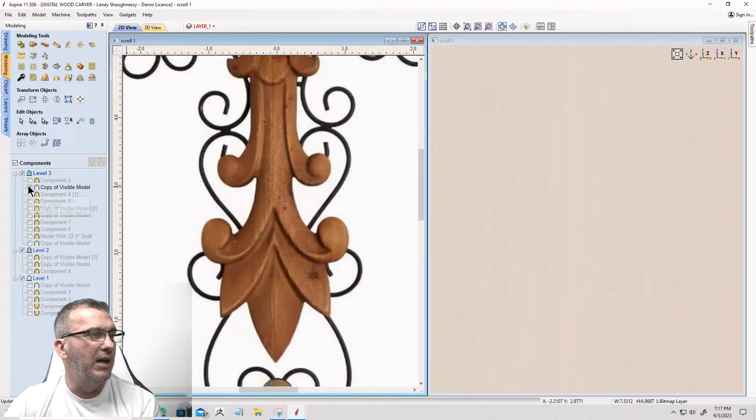I want to at least show the concept of the parts that we're going to be building from scratch, and how those parts are going to be put together in order to ultimately create this piece. I'm going to show you how to do that.

My hardest thing when creating parts is scrolls, these kind of swirls here and everything. It challenges me, but as you can see, I can do it, right? And I'm going to teach you how to do it too. But my biggest challenge was always trying to figure out how to build these scrolls and all. And they're done in multiple parts as well.

So that being said, let's turn everything off here. Let me minimize these. I'm going to start a brand new level. We're going to be starting from scratch tonight. And in level 4, this is going to be renamed my class model, part 1. Okay.

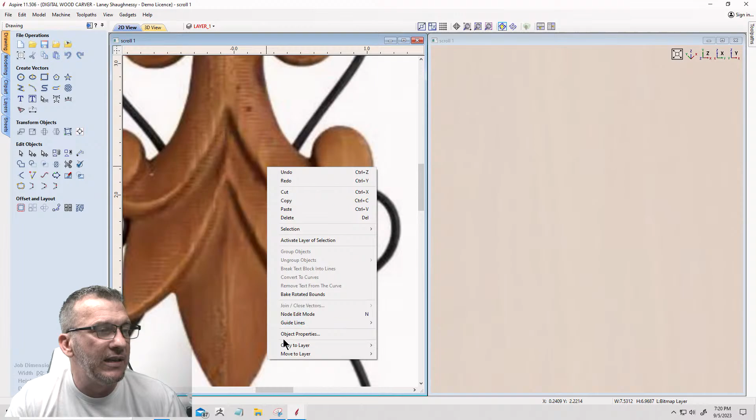On the image, if I right click, I get a menu, and I can come down to Object Properties, referring to that picture's properties. The only property the picture has is its fading property, so I can fade that picture in and out. And what I want to do is turn the fading off.

Whether I'm clicked on this photo or not, I want the fading off so it doesn't gray out, like when you're not clicked on a photo it usually fades out and you lose the detail depending on the photo. So I want this fading to stay off. I'll close that now.

Again, that's by right-clicking and going to Object Properties. In the Object Properties menu, the fading is normally set to default. We want to slide it to 0 so it stays dark. Now I'll adjust that fading property as I'm drawing just to see the lines, but while creating them, I want it in its full clicked status, like it's selected all the time.

The next thing is we're going to start with the swirl. Once we draw one swirl, the others we can just make from that swirl by sizing it down or up, whatever we need to do, so we don't have to draw a million vectors. We just have to create some of the main components.

So let's start here. Since we're working in 2D right now, just creating the vectors, I'm going to start with drawing those out. You can draw these vectors a lot of different ways - use the new freehand tool, the draw curve tool, the draw arc tool, whatever you want. I'm going to do a combination, using the arc tool: click here, click over here, and pull that arc just to get the rough shape.

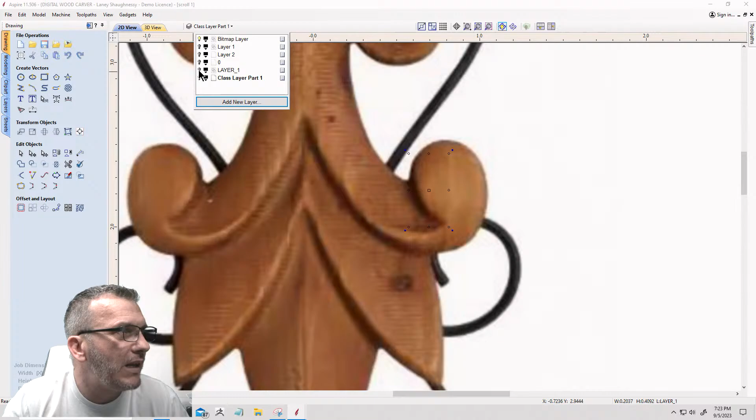And we don't want any other layers on, so we'll make that the active layer. Now we can start again. Once again, with the arc tool, I'm going to create the rough shape with a series of arcs. Once I have all the arcs created, I'll end up connecting the segments, smoothing them out and fine-tuning the shape. But for now, I'm just clicking in one place, clicking in the other, pulling the arc, and clicking again.

Now let me change the color of this layer to something we can all see when drawing. Let's see if we can change it to... red's hard to see because of the wood color in the background. Let's try... I'm looking at the computer screen to see what's easy for you guys and girls to see as well. Oh, these colors are all hard to see. Let's see here. Man, alright, let me do this.

Let me fade the image just a little bit. So, right click, go to Object Properties. Let me fade it just a little to where I can still see it, but it's not faded too much. Okay, let's see if I can pick a color that everyone can see. Ooh, that's a tough one. That's a tough one.

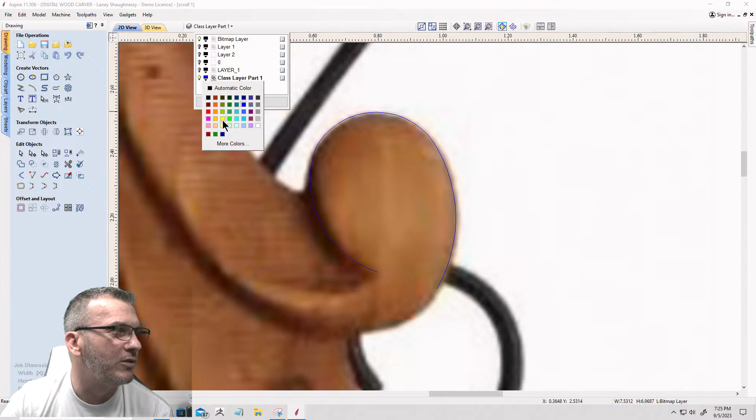Let me know if y'all can see that yellow. Someone said the green pops pretty good. So that's yellow, I don't know if you can see it when I'm up close. Alright, let's try green. I wonder if it's neon green or regular green, let's try neon green.

Alright, yellow or green for right now, ladies and gentlemen, give me a vote in the chat. And as y'all are voting, I'm still going to continue with the arc tool. Again, the arcs are just for the purpose of giving me something to work with.

Yellow is good, someone says. Alright, let's try yellow out for a while and then we'll pop back and forth if we need. Okay, try yellow for a while.

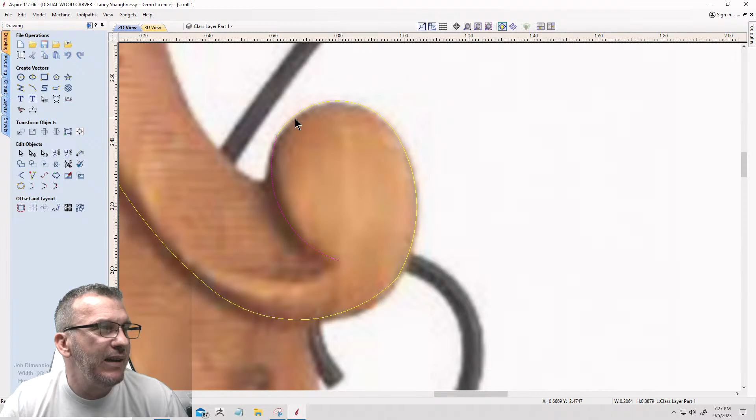The first thing I want to do with these segments is make sure the endpoints are together. To do that, I need to select both lines, both segments, by holding the shift key down when selecting more than one vector. Let's get into here.

What I'm going to do is make sure the endpoints come together. If I missed the endpoints, I want to make sure they come together, so I'll continue holding down that shift key, selecting the next line. I'm going to click this join by moving the endpoints to a common point of intersection. All that's doing is connecting these segments together, not smoothing them out, strictly just connecting them.

It's not smoothing them out or anything, it's strictly just connecting them together. Hold that shift key and do the next one and click on that button. And now this as a whole is one line.

So, let me do this one here. And here, for some reason, it did not want to do it the first time. This and this, do it again. And again. Alright, now that segment is all connected together.

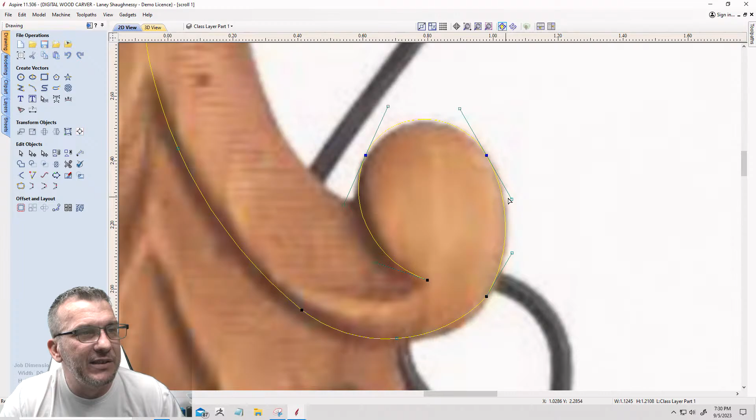And then same thing on this side of this node, I'm going to right click and make it a Bezier curve, and then on that node itself I'm going to smooth it so it gets rid of any hitches or kinks. That way I can manipulate this however I need.

And then again, on this side of the node, it's still an arc. I'm going to change it to a Bezier curve and smooth that out so I can adjust this arc here. And then the last one, I'm going to make a Bezier curve and smooth that out as well. All that does is give me a nice little curve, and it gets rid of the hitch where my arcs might have met up at kind of a kink, it smooths that out.

And then this is just going to kind of dead end up here. I'm going to pull it a little bit more to the right, kind of go about to the middle there. And I'm going up far. You see this kind of V's right here? We'll build that later, but I'm going to go up kind of far here.

Now my next part is to finish off the vector. Think of a 2-rail sweep. We're going to be using a 2-rail sweep. We need 2 lines to sweep a profile. So this first rail is the first line that I just drew, this first kind of swirl. Now we're going to draw the second rail, and we're going to do the same thing.

I'm going to use the arc tool, and it's going to start where the first one ended, and I'm going to pull that arc there. Now this one is going to go right along this ridge. I don't know if you can see this ridge right here, this kind of hump. It's going to go right on the inside of that ridge. So I'm going to go one full line because I can go just 2 segments here. And I want to go kind of close to this one, and pull it right on that ridge, just so it kind of follows that ridge.

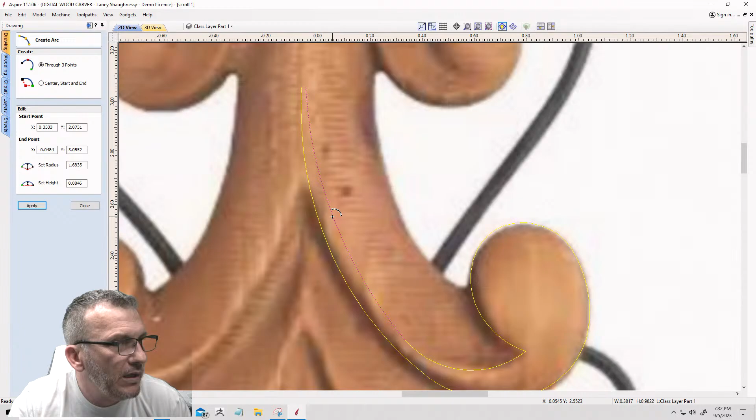All right, now I'm going to take this and this, these 2 items here, and join them together, put the endpoints together in case I was off a little bit. Then I'm going to go into node editing mode and make this a Bezier on one side of this node and on the other. Then I'm going to smooth that point out, which is already smoothed out for me. It did it on its own, kind of.

Now I'm going to adjust this to get kind of in that hump. You can kind of see the hump, that grayish hump right there. That's what I'm trying to get to. I want to move in just a little bit, or move out, should I say.

Okay, so I'm going to be happy with that for my second rail for this top part. Now you have to think of this top part, when it comes to this kind of scroll, if you will — I always had trouble. I always thought, man, how do they get it to be bulbous here at the top, but then they have it this negative here, and it's because it's two separate parts put together.

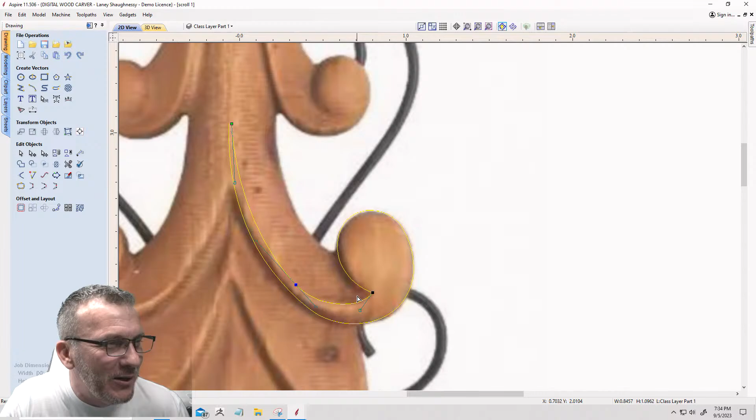So on this part, think of this as kind of a curved shape, and it's kind of like a dome, if you will, right? It's got that dome shape to it, so it kind of domes up. Not dome — it dishes. It's got a concave here, and so I need this component, when I build it, to blend with this one.

So the one rail for this part is going to be on the inside of this, because when that part gets made, I want it to be made inside of this. So I'm actually going to just use this line right here, and I'm going to hit copy and paste — no, I'm sorry, not copy and paste, I'm going to hit offset, and I'm going to offset inward just a few, in this case 10,000ths of an inch, and that went the wrong direction.

Let me hit undo, Control Z. I need to go outward. There we go. And I need it to be just inside that yellow line. So it's right here, this second line right here, just inside there, just so that when the component gets created, it will merge with my other component, that upper level and everything.

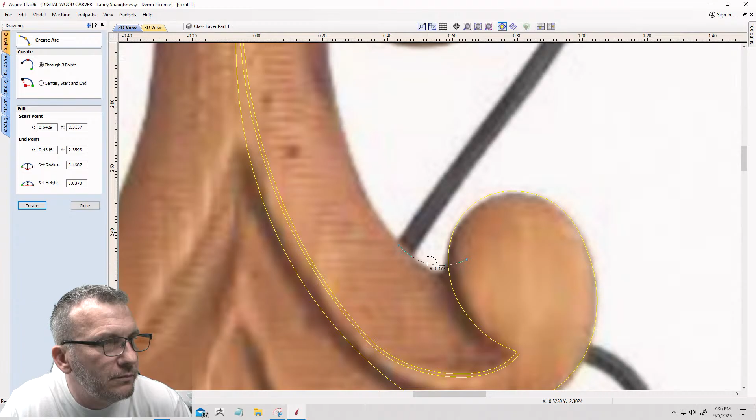So that's going to be the one rail, and it's going to go all the way up to here, and that's fine the way it is. That's good. Then my second rail is going to be here on the outside edge. So now I'm going to go back to my curves, my arcs and stuff, and I just need to do it in 2 arcs.

Now we are using the image as a reference image. It doesn't have to be 100% exact. You can make adjustments. I'm going to have it come in just a little bit instead of right on the outside edge there, a little bit. But on these two segments, I need to connect them together.

So let's join the endpoints, and then I'm going to go to node editing just like before. Bezier on one side of the node, Bezier on the other, and then smooth that node out. And now notice that this comes in more right here on the actual part, and I can get this to do that.

But if it causes a kink in my part here when I build the model, because it's too tight or something like that, then I might not follow it exactly. But that's going to be good there. And here, I'm going to pull this in just a little bit.

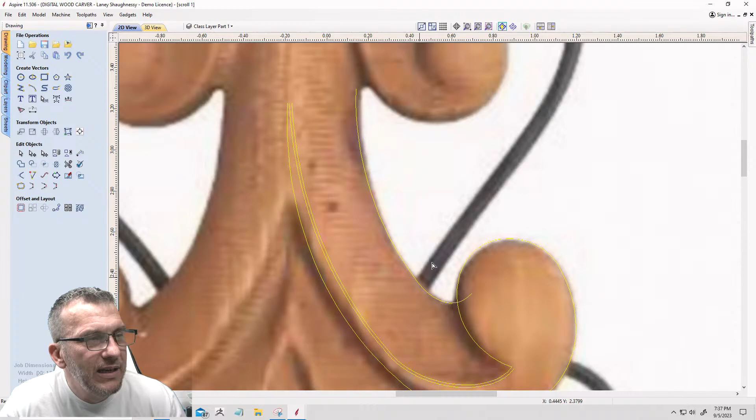I need a line, kind of a shape here, if you will, but I can't have them connect. But I do need it to connect to this. So what I'm going to do is use my arc tool, and I'm going to connect from here, and click close to this one, but not right on it. I'm going to kind of create that for just a minute.

I'm going to get up close and personal here. I'm going to bring the node where it's close to but not connected to. I'm not going to join these two lines, but I'm going to bring the nodes or the endpoints where they're very close with one another but not touching, because I need it to be two rails. It's a two-rail sweep, so I can't have them joined together.

But I do need it joined over here, on these two, so I'm going to connect these two together. Let's hold the shift key, get out of node editing for a minute, join this and this, and bring the endpoints together.

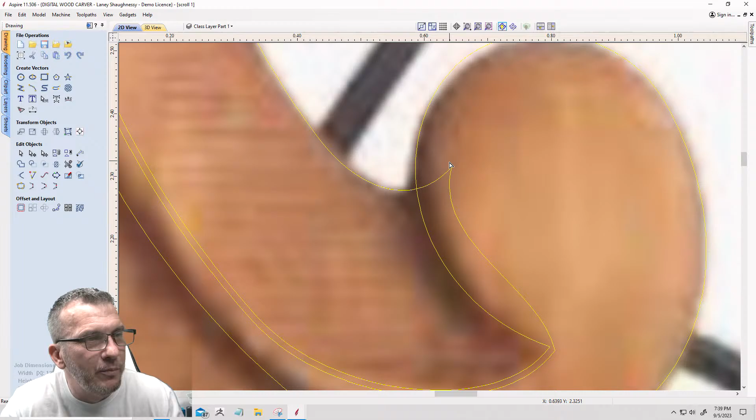And then in node editing, I'm going to make this a Bezier curve, and it's going to be a weird looking shape, but it's going to come into this bulbous area a little bit like this. And because again, it's going to be low and merging into this part, you won't even see it.

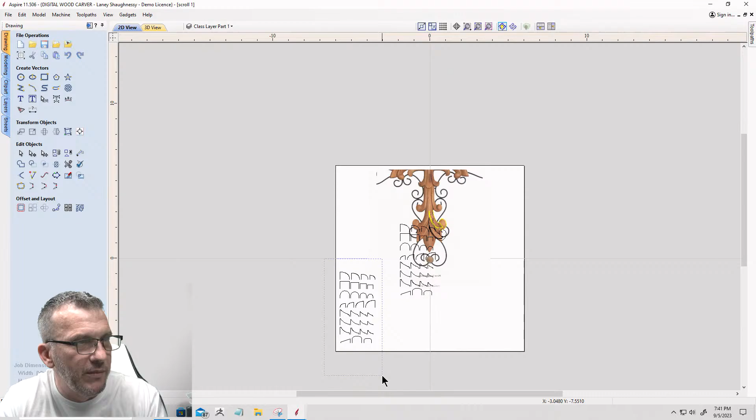All right, let me take those. These are them there. Let's do an undo real quick. Undo. Let me take these and move them to my working layer so I can turn off the other layers.

All right, let's move these up where everybody can see them while I'm kind of zoomed in. And what I have here, let's put these on a different layer. Hold on a second so we can see them. Let's move to a new layer. I'm going to call this Profiles, and we'll leave it black so that way everybody can see.

All right, and so on these profiles, what we have are a variety of profiles scaling down. Basically, this is 100% of the shape size. Hey, Brooks, man, thank you very much.

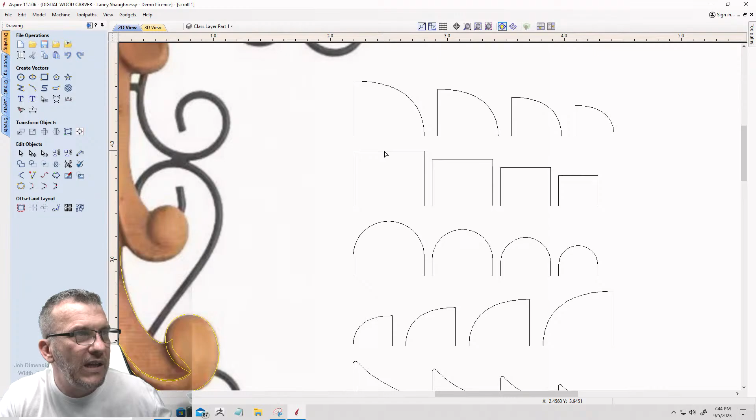Basically taking this shape created all the other shapes. In node editing, you delete this point, turn this into an arc, and pull that arc into shape - that's how that shape was created. Undo that. Or taking this and turning it into an arc, then sizing everything down - that created this shape. So on and so forth.

So there's a couple of curves there, a couple of concaves, and then some angles and stuff. So you're going to have a DXF file of all of these.

Let me get this all back to where it belongs. Okay, you're going to have this DXF file, it's called profiles - scroll profiles. And we're going to be using a combination of these to create our shapes.

Now let's split up our view here because we're going to be doing some 2D and 3D view. We're going to be building the part now, so we're building these parts. We're going to draw the vectors, and then build the part.

Hey, no problem Rob, don't worry about being late. We're just getting started. We just drew some vectors, as you can see on the screen here, these yellow lines and everything, and things are just getting underway.

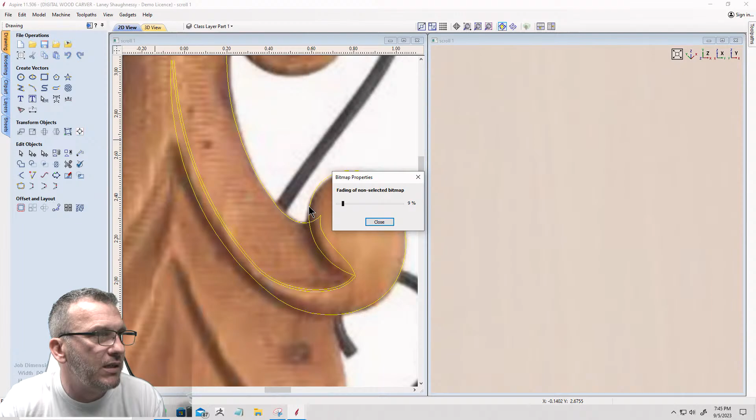Let's turn our fading to none. Should be able to see that yellow a little bit better there. All right, so first things first, rail selection is important - which rail we select first and which second when we're building components and doing 2-rail sweeps. But with this tool in Aspire, this part, ladies and gentlemen, this is an Aspire feature.

Harvey, I like greener landscape. I hope, Harvey, I don't know if you were answering someone else's question to you, but you probably were. And hey, I hope you enjoyed the leftovers. Okay.

We're going to do the bulbous part, the upper part, first. So I'm going to select this main rail first, hold down the shift key, and select this inside rail second. So this one first, hold shift down, this one second. In my 2-rail sweep tool, that's going to be my drive rails. Now depending on which way the drive rails are facing, we may have to go in and reverse the rails, meaning having them face the other way.

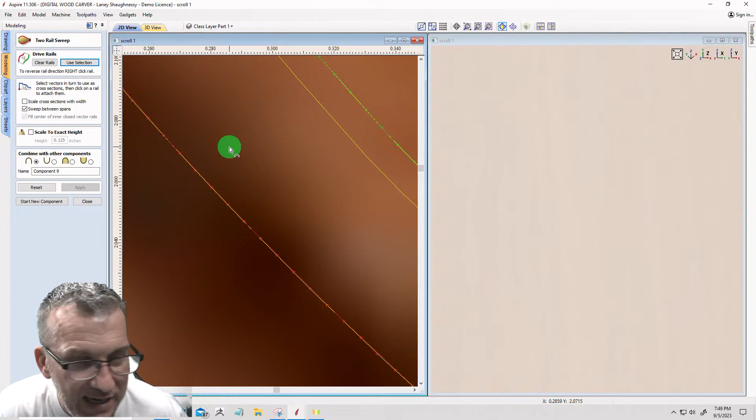But anyhow, the arrows are pointing in this direction, so they're sweeping up from the bottom right corner of the screen to the top left, and that's what we want. Hey Sylvia, how are you doing? So that is our two rails, they're selected.

Now we've got to select a profile. The first profile I'm going to select is this square profile, and I'm going to come over and click my mouse right on this node. You're going to see all these crazy cross sections pop up here, and this is going to kind of create the area of the cross section, the main part. But we're going to come over to our profile here, this top one, this curved one, and we're going to select that next.

And out here over on this side of the bulb, we're going to click. When I click on that, it's going to shoot this red line across the screen. So this yellow node is my second cross section, and it shot the red line over here.

Now I actually need to grab the white end of that. There's a yellow and a white. It's hard to see, but I need to grab that node and pull it around. Let me zoom in, and I need to pull it close to, but not on, this node right here. Not on it, but just very close to it.

Now you'll see the cross sections are more in this bulbous area, and they're not jumping across anymore. We don't want them jumping across. You can see that they're in between my two lines at different spaces. So that curved profile is going to be in this area.

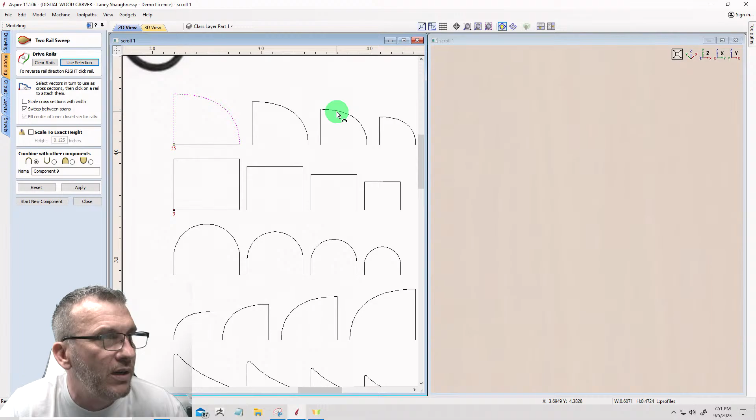And now I need the same curved profile, but I need a smaller one. I'm going to choose the third one, no particular rhyme or reason, I just want a smaller one. But this is going to be my third profile. You can see these numbers here.

I'm going to come over, and at the very end, I'm going to click on the node. It'll change that color, so it's going to size when it sweeps around. What I've just done is, when this sweeps around, it's going to scale as it sweeps from the larger to the smaller profile. So as it gets closer to the tail, it's going to get lower and lower, sweeping around high, and then as it gets to the tail, it's going to sweep around lower and lower.

So we're using what's called cross sections, and these are cross sections, our profiles here, and we're sweeping. We have a square form for our shape, but we want a rounded top, and we want it to sweep from the larger to the smaller one as it gets to the end.

This is going to be the hardest part of modeling, especially in the two-rail sweep, is understanding the cross sections and how the section is created. Basically from this line here, that sweep is going to sweep from large to small. That profile is going to sweep from large to small because it's going to end there.

And I'm going to show you, we're going to create just a square profile so you can see for reference, so you understand. But we're going to do a merge. We're not going to scale the section here, and we're going to click apply.

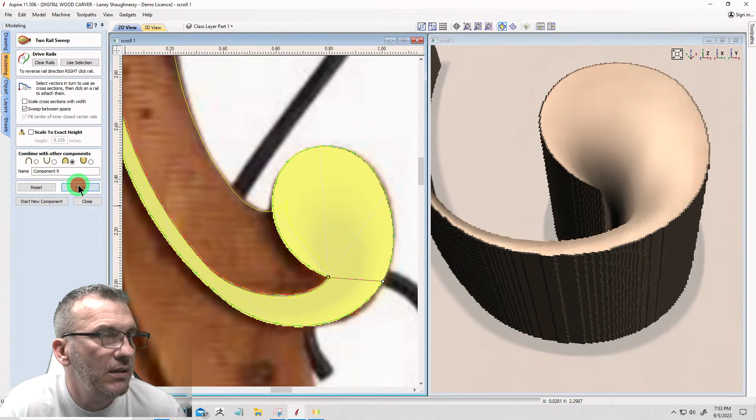So rail direction is important. I clicked on this inside rail first, that made it red. The outside rail second, that made it green. By doing that, it was taking my profile and reversing it, making it concave in instead of convex out. So I had to put the mouse over the rail and right click, and swap the rails, make this one green and this one red, so that it did the opposite. It created that bulbous here.

Okay, all right, let me get back into shape here. So what we have is my profile, my big curve, that big curve right here, scaling down. Let me see if I can turn this. Big curve right there to little curve right here. So it's scaling down as it was sweeping across those two separate profiles. Big to little, and that's what we need to do.

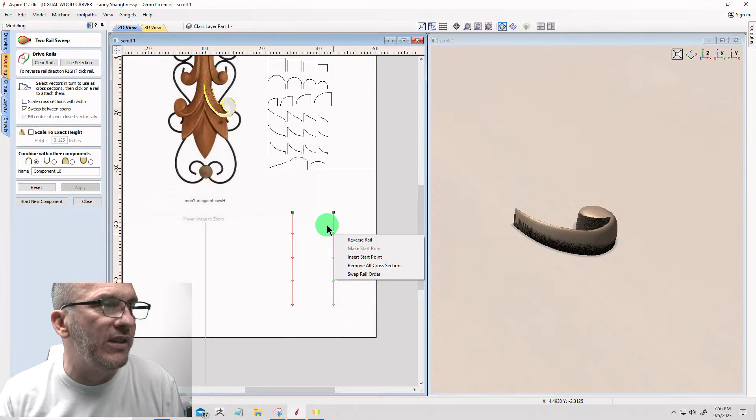And if I have to change the rail order, it means this one needs to be first, this one second. So this is red, this is green. It'll switch, okay.

Just depending on what it needs. And in my case, I needed to swap those rails.

Now, let's grab a profile, and let's do the regular dome here first. I'm going to come and click right on my first node, and you'll see these lines come up on the screen. These are cross sections. Now, that profile is getting swept from one end to the other.

So, if I apply that, we're going to have this dome-shaped part, and let me zoom out to where it is. We're going to have this dome-shaped part that's the same size all the way through, right?

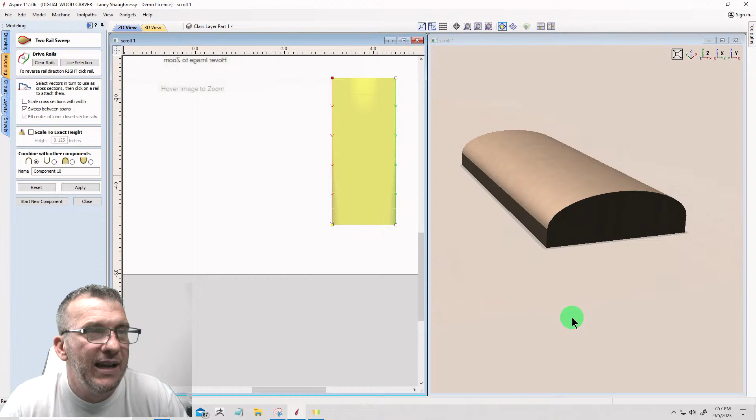But if I come in here and select this smaller dome, and I come to the end of my line and click here, now it's going to scale as it goes from one end to the other, from that large to that small. So when we click here, you should see I start flattening out a little bit as I get from one end to the other, from that large to that small.

Now, you have to understand something here. Your profile is kind of close and round. Why is this more flat and narrow? It's because my lines are wider, right? If my lines were closer together, I would be taller and wider. But they're spread apart, so it's kind of narrow and short. But my large profile sweeps down to my short profile, right?

Now, what happens, let's say that I take a concave profile and make that my profile on one end, and I take a convex profile and make that on my other end, and I click apply, I'm going to go from concave to convex. So let's turn this around where you can see. So as it transitions, it's concaving or convexing here, but as it transitions perfectly into that convex, transitioning perfectly into that convex.

And let's say, just out of curiosity, just so you know, if I click here and I click here, so round to square, let's go square at the end, down here, and click apply. It's going to go from round to square, right? So it'll be round here and square here.

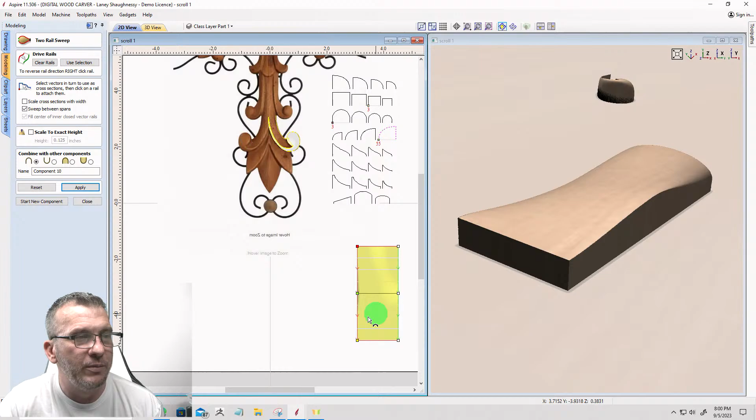And that is how, using multiple profiles, we get different shapes in 3D models. Like when flowers have curves, they're bulbous on one end of the flower, but as they go into the petal, they're kind of flattening out into a concave shape at the petal and stuff. And we do that by transitioning the cross sections, and we can add in multiple cross sections to get all kinds of different shapes.

Okay, so in my case, I went from the big curve to the small curve on that shape we're creating over there. All right, cool. All right, so that's kind of a little quick and dirty lesson on cross sections. All right, let me come in here and delete that.

All right, now coming back here, you're going to actually see that transition because in this, look at my shaft right here on the base of this cross. It's convex, right? It's convex, it's curved upward, it's domed. But as it transitions into this kind of upper area here, it starts to concave, right? It goes from that arch and it starts to concave into here.

And so that's what I need to happen on this part. So coming back, we're going to select, let's get onto our 2-rail sweep tool. We're going to select our inside rail, hold down the shift key and select our outside rail. The important thing is the order. Let me learn where my shift key is.

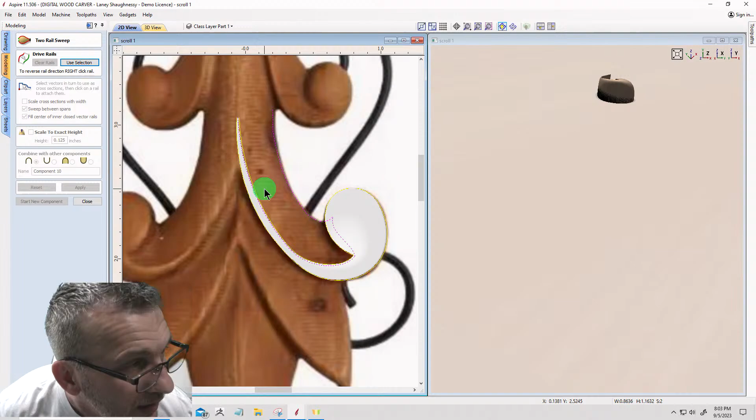So in this case, when I choose the rails, right now they're going into this section here, into here. And so my first profile is going to be this large profile here, and I'm going to click on it to create that cross section.

And then I need to concave in this direction here, so it's going to be this one right here. This is going to be next, and I want it to be kind of the same scenario where I'm going larger to smaller.

And I'll go to the third one here because I want it to get smaller as it goes. It's got to get lower, lower, lower as it goes under that bulbous there.

Let me get zoomed back into the part here so you can see what happens. I'm going to be transitioning to this part here, so we'll make that there, and I'm going to merge the two together. I want to make it merge, and I'm going to click apply.

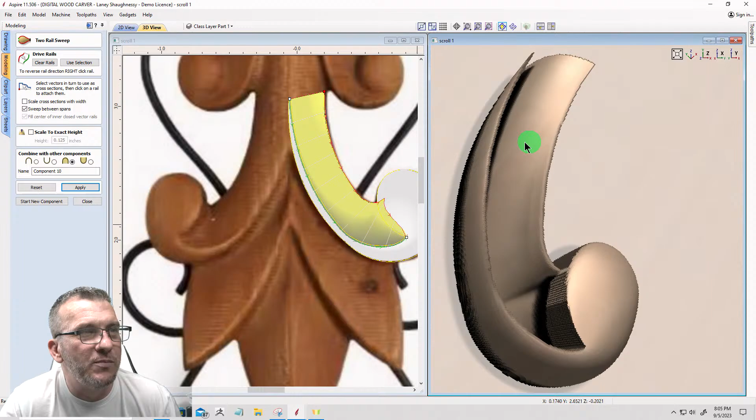Okay, now let's pay attention to what I'm doing here. You see it's backwards, my curve is backwards here because my rails are set the wrong direction. So I need to come in here and reverse the rails, or swap the rail order, and then click apply. That'll turn that profile around.

Okay, so I'm going bulbous here into that concave down below. Let me get zoomed in so everybody can see. So we're concaving, creating that half of that staff there into that convex, into that arch.

Now we've built one part. Now we're going to touch it up a little bit. Now, in my component tree, I've got my two separate parts. I'm going to be sculpting them, touching them up, smoothing up the edges and things like that. And if I select these two parts and start to sculpt them, the software is going to require me to bake the two parts together as one, the two components together as one.

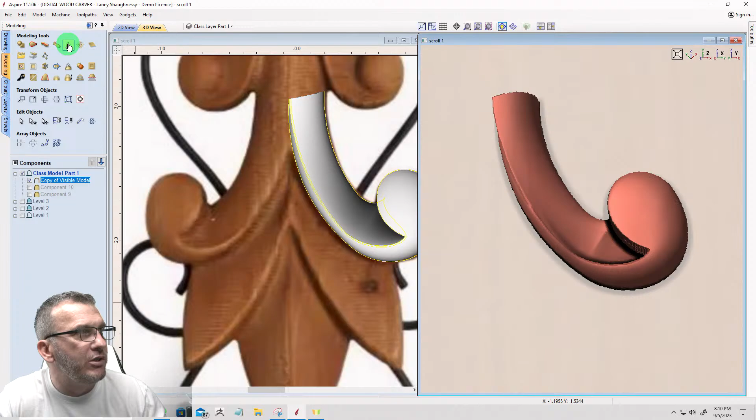How you doing, Mark? Hope all is well. How was your podcast tonight, or how is your podcast that's coming up?

Okay, we're going to use the smooth tool, and all I'm going to be doing is, don't hover on a place too long. Keep that brush moving, or it's just going to keep flattening it out. I'm going to start rubbing this top edge and smoothing it here, around the edge, around this inner edge on the top, smooth that out, come back.

Now, when I'm smoothing this, I have to be mindful that my line, that ridge, sometimes it can smooth out too much, and it doesn't look as defined, or it doesn't look straight any longer. It might be wiggly looking, just the way it smooths.

So in here I've got a little bit of a hump. Let's see if we can fix that. Now I've got to twiddle my view to zoom in. But in here I've got a little bit of a hump, and the smoothing tool, all that does is smooth it out.

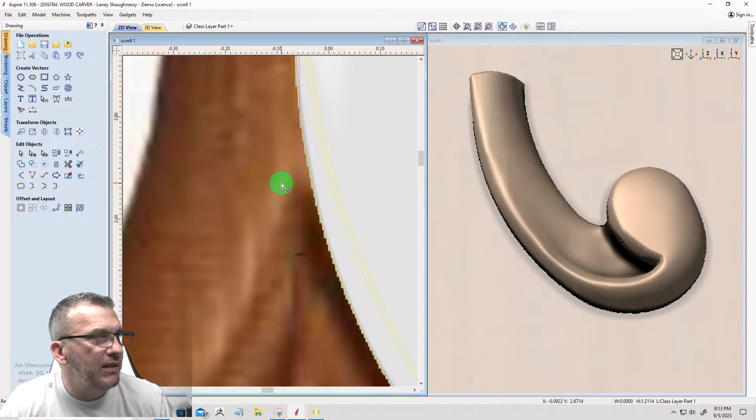Snap to 90 there, boy — snap to 90, there we go. I don't know why it wasn't snapping. Space bar to finish, and I'm going to take that line and extend it down. And that's going to kind of be my center line. And I'm going to take my part, my model.

I'm going to select that model, hold down the shift key and — oops, let's try that again — hold down the shift key and select the line. It doesn't like me right now. It does not like that. For some reason, it's not wanting me to select that line.

Okay, stand by. I don't know what was going on, but it was not letting me select that line. But anyway, we are now going to mirror this, and we're going to flip about the line. Now, flip about the line is not active, most likely because it's touching other lines. Let me see.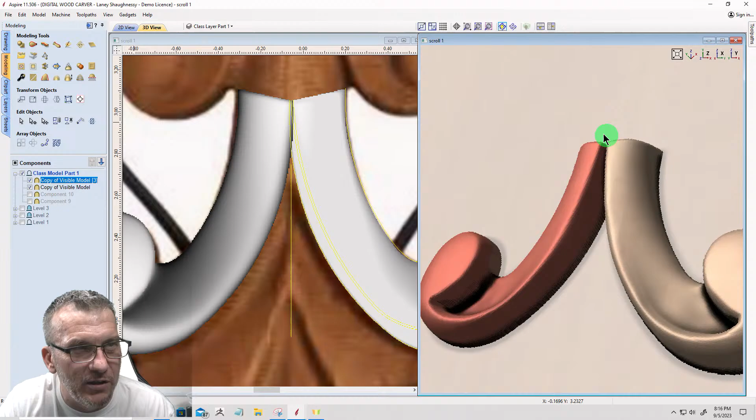All right, so there are our two parts. Okay, next.

Let's do the leaves. Now the leaves are easier than the little swirls. Those swirls, ladies and gentlemen, they are the bane of my existence. Now I've gotten pretty good at being able to make those, but I'm still not perfect.

There's this one guy I don't know who it is on YouTube, he doesn't have any sound or anything in his videos. He's just drawing, you know, picture to 3D model and everything. And he does scrolls and stuff like this in some of his videos. No talking whatsoever, he's just going on. You just got to watch and figure out what he's doing, watch his mouse very closely kind of thing.

But his always look perfect, his swirls and everything. Mine are a little rough around the edges, you know, the transition, this arc isn't as nice and clean as I'd like it. His are perfect, right out of the gate every single time. I don't know how he does it. But you get as good as you can get, right? And you just practice, practice, practice.

Okay, now the leaves. You have to think about, even though this leaf here is hidden underneath this scroll, there's still a leaf there, there's still kind of a full arc. So when we draw this.

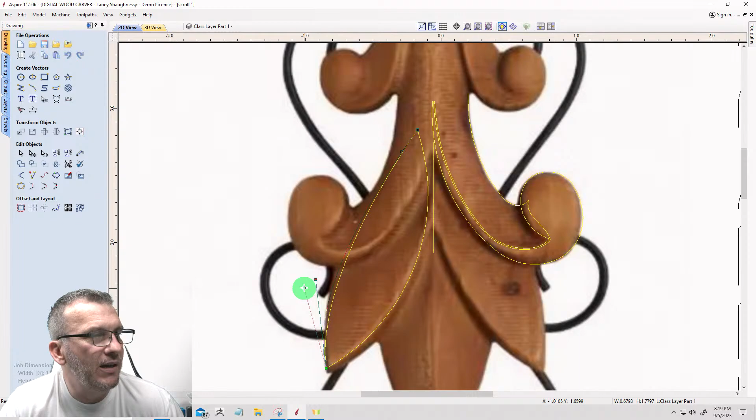In node editing, to a Bezier curve. And I'm going to pull this in just inside and pull this out like so. And on this one, I'm going to pull this out like so. All right, that's going to be my shape.

Now on this one, this is just kind of a slant. You know, it just slanted down. So when I do my 2-rail sweep.

It turned my model back on. When I do my 2-rail sweep, I'm going to select that and that. That's going to be my rails. And then on the profile, I'm going to use this profile right here, this profile here.

And let's go to a split view so you can see what gets created. And we're going to merge that in and click apply.

Okay. The leaf here, I need it to kind of scale. Let's see, let me turn on the scaling here. Let me see if I'm wrong on that thought process. Yep, no, that's what I need.

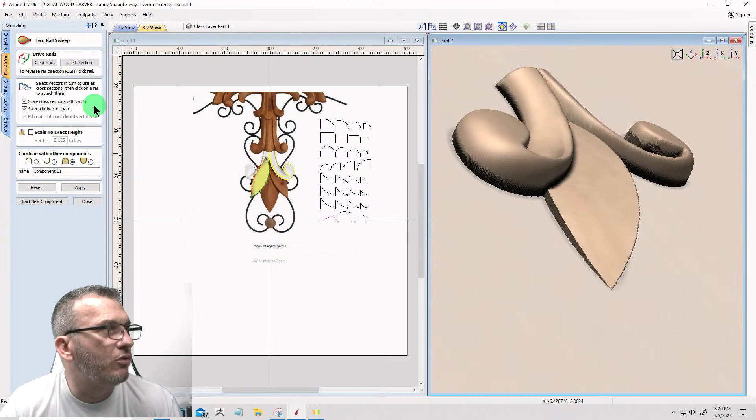So this one I had to scale the cross section with the width, so it creates a consistent flow there. Okay.

All right, so on that one, I'm going to close out of that tool. I'm going to click on that component and this component here, and I'm going to give it a little bit of base height. I want to raise it up a little bit, but now I got to be careful that I don't raise it up too much, because I don't want to be able to see any part of that leaf poking through.

So I'm going to go into the properties, that spanner wrench tool, and I'm going to give it some base height, a 1/16 of an inch. Okay, now when I gave it that 1/16 of an inch, that was a little bit too much. So let's bring that down some.

I just want a little bit of base, not a whole lot. Okay, I'm good with that.

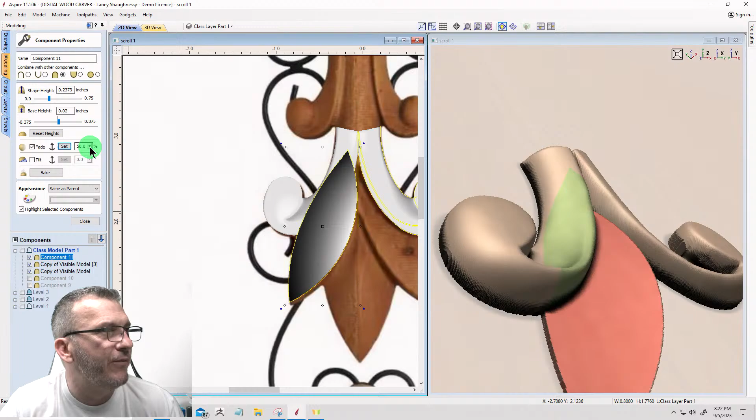By default, it's set to 50%. You can see that fading went away—it made it disappear there. Now, I don't think I need a full 50%, so I'm going to back it down to about 20%. I want to see if it's sticking up at 20%, which it does, but it's so small. Let's go 25. Still there. Let's go 30. Good, so it just needs that small fade.

All right, so there's part 2. Let's go ahead and select it—select the line, hold that shift key down and select the line, and then mirror flip about the line.

Okay, now these parts don't quite touch one another, and I'd like them to kind of crisscross. I'd also like them to come up a little bit more. So I'm going to undo that—Control Z, undo the flip for a moment. This is where I'm going to deviate from my model a little bit. I'm going to scale the size of this up and over, kind of thing, so that when the parts do flip, when I flip about the line, and I need to bring it up some too. I want to size it up about like that.

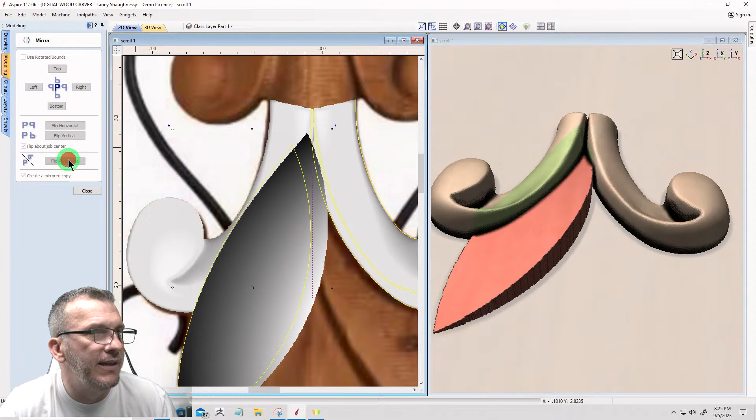Okay, now ladies and gentlemen, you're going to learn the cool effects of merging low versus merging high. We don't really get to talk about that too much, and one of these days I want to do a class on it—I did that with Mark Lindsay's group and everything. But you see that where I'm overlapping here, those parts are sticking up. This leaf is sticking up over here, and this leaf is sticking up over here.

On these two parts here, I'm going to create a new level, and I'm going to rename this level 'my class model, Part 1-A.' I'm going to take those two leaf components and put them up into that level, moving them out of the level they're in. I need these two models to interact with one another independently, but that level they're in needs to interact with the level below, and all the other parts need to play nice together.

So for the combine mode of the level, how it combines with the level below it, I'm going to change it to merge. I need it to merge—just like they're merging right now. But these two parts have to interact differently with each other. So how the level interacts with the level below is different than how the models inside that level interact with each other. So we're going to change this combine mode to low.

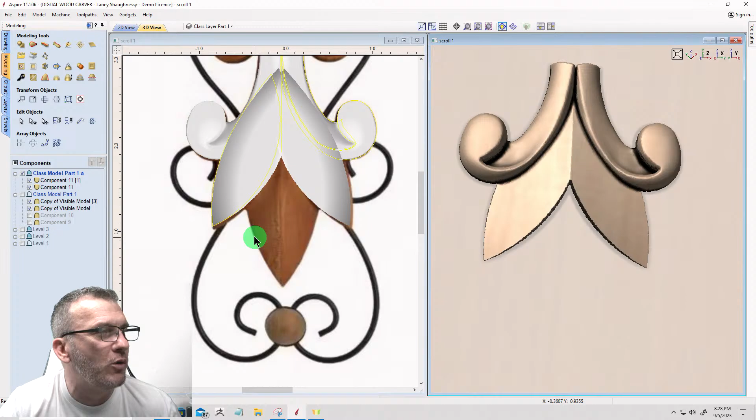Very, very cool. Okay, now we're just moving along, cooking with some gasoline. All right, so now I've got those two parts—wonderful. And the next part is this leaf. Again, we're going to imagine that this is a full leaf here, it's just underneath all the rest, right? So let's turn off our levels for a moment.

Let's hide some things and go to our drawing tools. I'll use the arc tool again, starting at the end here, going up to right about there, and pulling that arc over to here. And from the end here, same place, pull that arc there.

Now, on this profile, this leaf has kind of a ridge in the middle, and I'm not going to use any one of these profiles. I'm going to make up a new one. So we're going to make a new profile.

I'm going to take my arc tool and span right in the middle of my leaf, all the way across, straight across, and then just a slight curve. Very little. How much this curve is depends on how fat my part is. How big my curve is determines how tall my part is. So I want a slight little curve.

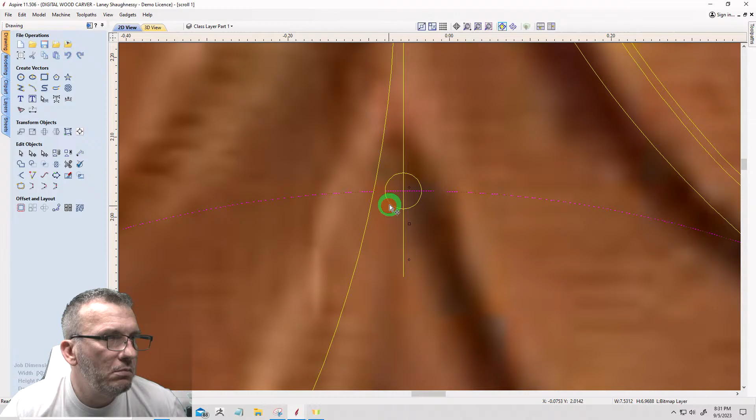Good enough. All right, now I'm going to take my scissors and combine this part here, this, and this. I'm going to join that as one shape. So that's going to be one shape.

You see I was long on this side, short on this side. I need it to go all the way to the end. It's very important. So I'm going to go into node editing and pull this back to this line. Node editing and pull this over to this line.

All right, 2-rail sweep. We're working that 2-rail sweep tool tonight. We're going to select our first left side, then our right side, and use that as our rails. We're going to select our profile that we just created, and we're going to scale it with the cross section, sweep it between the spans, and merge. Merge, create the component as a merge.

Let's get into a 3D view so we can see what's about to get created here. Click apply. All right, so now let's close that tool.

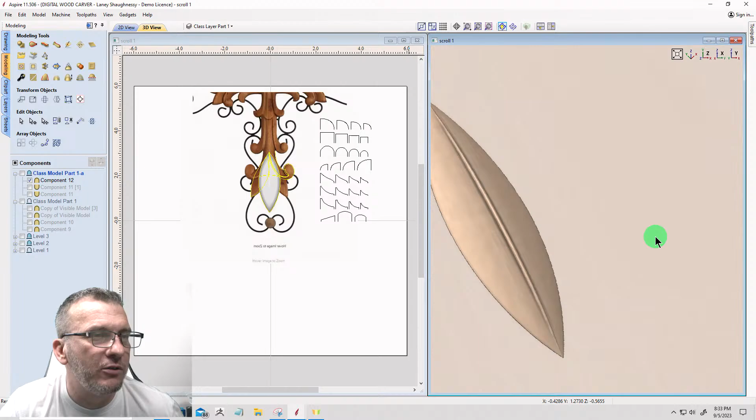Let's turn off our two side leaves for a minute. It almost looks like if you were building a little fly or beetle, you could do the same thing for the wings. But this is our leaf that was created, and there's that little ridge. So that's kind of our leaf. And how big the arc is determines how tall this is and everything. All right, let's turn on our other parts.

Now on that leaf, I'm going to select the leaf and go into its components. I want to change the height on this. I want to give it a little bit of base height, a little meat underneath it. So I'm going to go 1/16 of an inch of meat.

All right, let's try that again. And the important part is that I don't intersect too much over here. If I turn the part off, you can see I'm just coming out right there, and that's kind of fine for me. I'm okay with that, because my handle, or this rest of this leg, is going to come down over that.

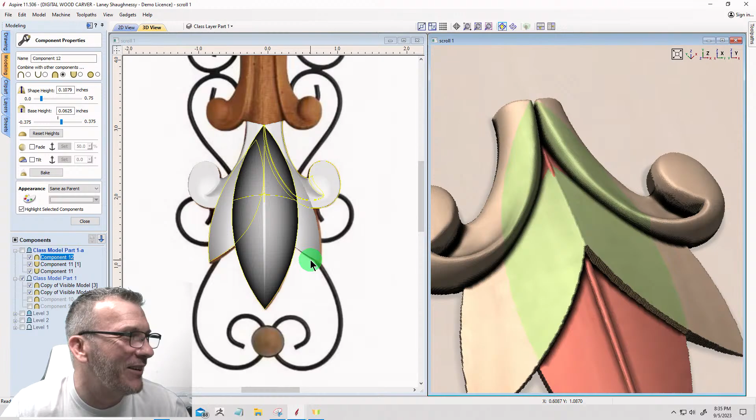Take my fade and set that, going from here to here. I'm going to turn that fade down dramatically low, because it only needs about 10% of fading. Oh, a little more than that. What I'm looking for is right up here, that little bit of red right there. So let's go 25.

Good, so 30% fading. All right, so that'll get rid of that. So now this is our shape so far.

Okay, now I've gotten a pretty good ways, and I've got all these individual components. So I want to be able to work with one component at a time. I've got my originals here, but what I'm going to do is go ahead and start a new level.

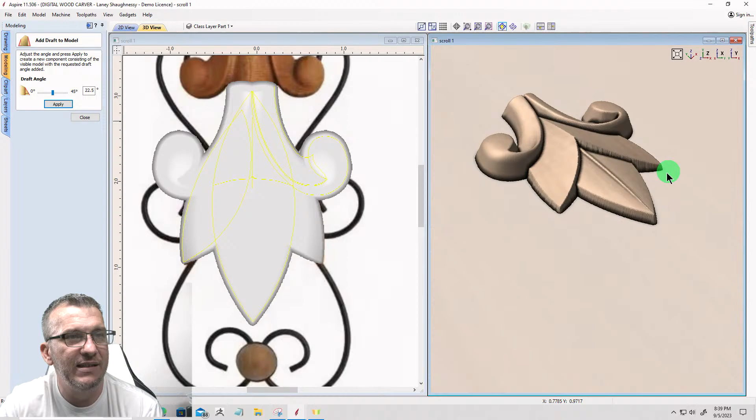All right, so what you can see is that little bit of draft here on the sides. It just kind of puffed everything out a little bit, gave it a bit of draft there. And that is going to be, let's call it the tip of my spear, right? So that's going to be the tip of the spear there.

Now, let's take a look at this cross in its entirety, and let's really see what's happening here up here. I've got it cut off, but let's import an image.

Okay, and let's move that up here. Now, paying attention, that spear that I've got created here, it's the same spear, just size smaller, that's on the left side here, and the top side there. So I don't have to reinvent the wheel, I just got to scale it down a little bit to make those 4 copies.

Okay, so once I've created that, now I can scale this and copy it around 4 times to create those pieces. So what does that leave left? That leaves my round shaft right here in the middle, and then it leaves this part right here. So this kind of middle cross right here, which is made up of these kind of U-shaped little swirls: one there, one there, one there, and there. And then this kind of humped shape here in the middle.

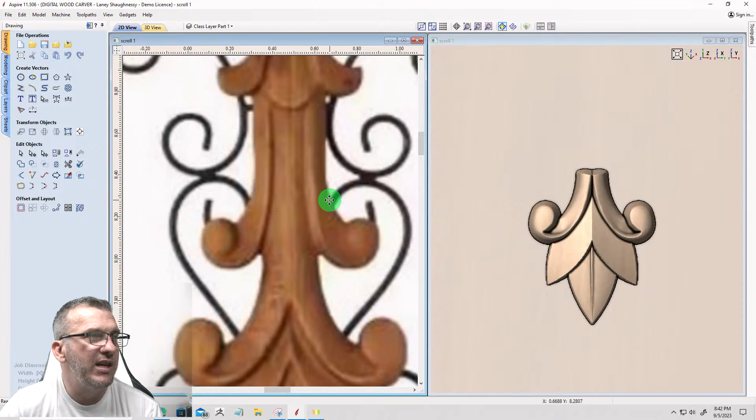Let's stay with the lower here for a moment, and let's create this shape here. Now I'm going to get rid of this image, I just wanted to show you in a full kind of what's going on there, right? But let's go ahead and get rid of that and go back to here, because all I need on this is this lower picture. Even though it's cut off here, I still can create it just from this. Here, that's all I need.

So the next part is kind of this scroll, so let's do it again. Arc tool, and again, I don't have to do this, I already have a copy. I can just drag the copies up, but I want you to see, right? So we're gonna start here, pull it to here, and pull that around. Let's go into the 2D view.

We're going to come over here to somewhere over here and pull that up. We're going to come down, pick a spot anywhere and pull that out. We're going to come over to here and pull that down. And then from here to here and pull that, about like that.

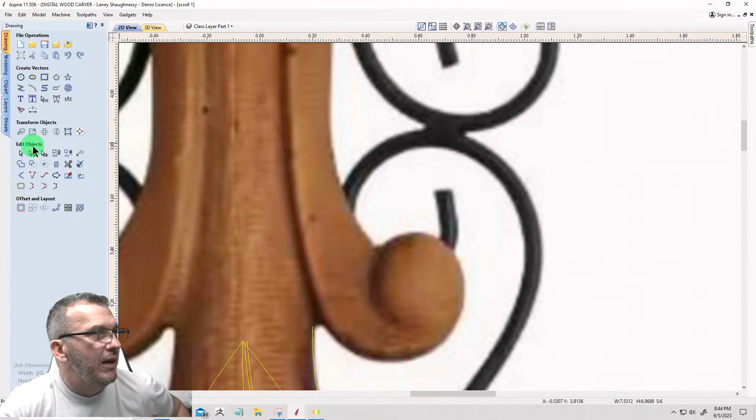For me, it's the arc tool, and then from there, in node editing, I can come in here and turn this into a Bezier curve on both sides of the node, and on my points there. Bear with me a second, I inserted a point when I shouldn't have. All right, one more time. Bezier curve.

Okay, these two ends did not join together. So let me do it again. Same thing here, for some reason that tool is just giving me a fit today.

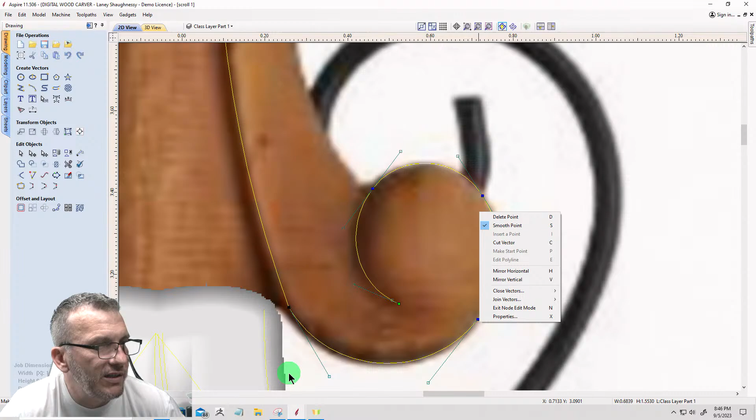Those are all joined together. Wonderful. Now I can get back in there and smooth that point, turn this into a Bezier curve and smooth that point. Turn this into a Bezier and smooth that point. It's already smooth, so just one more. Okay, now I can fine tune my shape.

I'm going to go straight up. Okay, so there's my first shape.

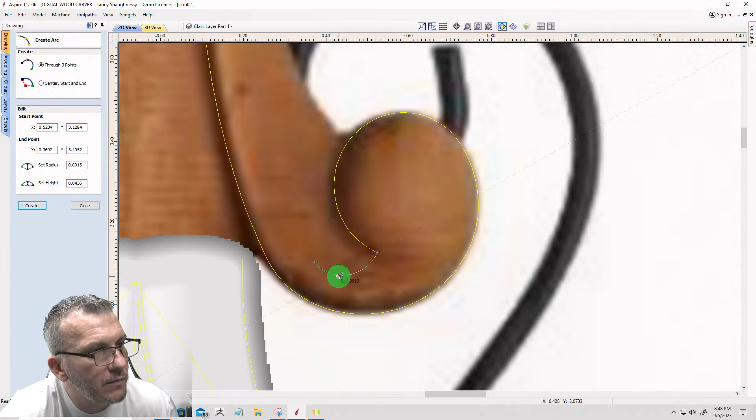Next shape is going to follow this ridge just like we did before. So arc tool, again, get close to but not connect. We're going to start from there to here. Whoa, undo, Control Z. And this one I should be able to go all the way up to here.

All right, when I connect these two together, I'll fine tune that line. So come in here and join them together, and I'm going to change that to a Bezier curve, smooth that point out. It's hard to see in here, but I'm happy with that.

That'll be fine. For this, again, the image is just to help guide me, not really be exact. I want to be right on this ridge, right on this ridge. All right, I'll settle for that.

While I'm here, in the drawing side and everything, I'll go ahead and draw the other two lines that I'm going to need. Remember, this one's already drawn, so I'm going to copy and paste it. No, that's a lie, I did that last time too. I'm going to offset it, 0.010 of an inch, to create that line right there.

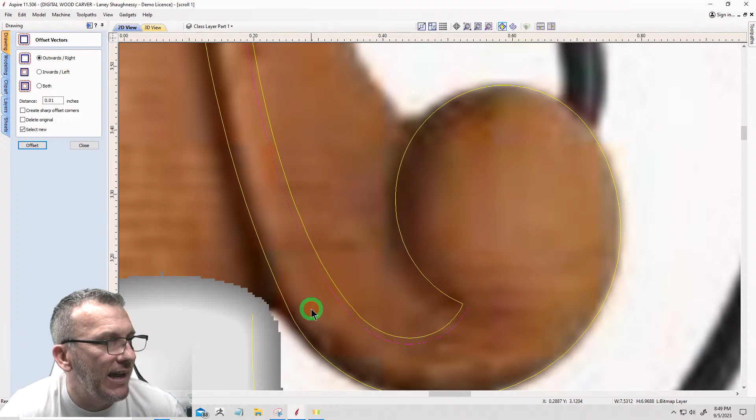Okay, and in node editing mode, I'm going to smooth out some of those points. I'm going to pull this line over.

Now, what you just saw me do was there was quite a few nodes, quite a few points that was created when that offset occurred. And I wanted to remove those points. I used the curve fit tool, there was a bunch of them, so the curve fit tool minimized it down to just a few.

Okay, I'm going to be content with that. Now on this one it's a pretty straight shot, so I'm going to go full on arc here, and I'll do a Bezier curve to adjust it. But I'm going to go into here, all the way up to here. Get the arc somewhat set, and I could have just done a Bezier curve, but I'm just going to convert this to a curve.

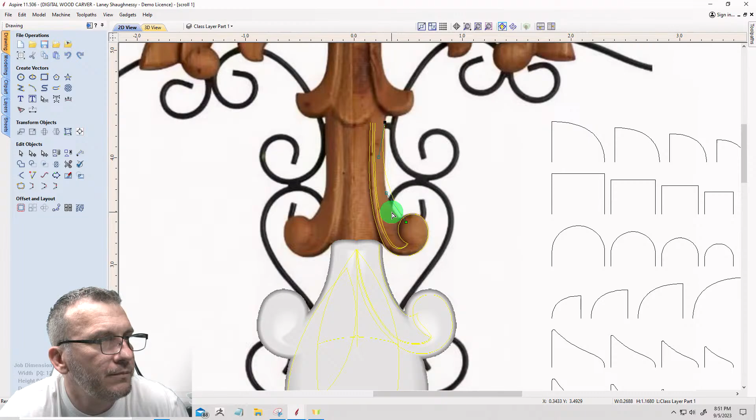I am good with that. All right, now again, I need to connect a line over to bring it close to here, but again, I don't want to connect with this line. So when I come over, I'm going to come over close, but I'm not going to join the two together.

And I'm going to make this curve kind of look something like that. All right.

Now we're ready to create parts. So let's go back into the split view.

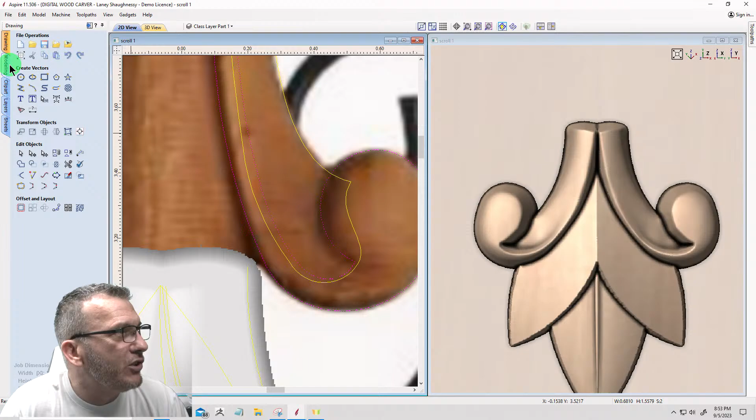Coming over to the profile, I'm going to go with the square profile first, and that's going to be my main profile right at the intersection here where the two intersect. And again, you're going to see all these crazy cross sections get thrown up. It's not until my next cross section comes into play on the bulbous side, and it's going to shoot that line all the way up to there.

Now, as I grab the other end of that red line that gets shot up from that second cross section, as I grab it and drag it close to my subject, did I?

All right, I've got to delete that cross section. I've got to do that again because I screwed up. So let's select that, click out here, find my other end, drag that other end down and around, but not on. Down and around, get in up close and personal with it. Drag that end of that line close to, but not on.

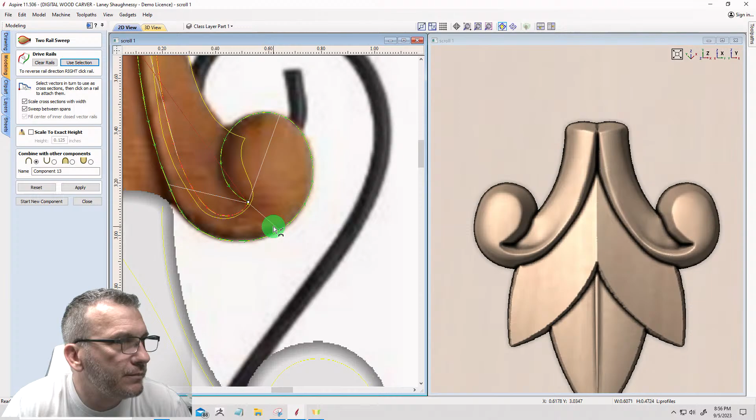Now, as I start to grab this end and bring it around, it's going to start adjusting my cross sections, and they're still kind of wackadoo. So I need to reverse my rails, so that they are inside of my lines. You can see now that that line is close to that center point, not on it, over here. And as I adjust this, my lines are inside that bulbous area, and then the rest of them are between my two lines. They're not all over the place. They were all over the place because of the wrong direction. The arrows were going out and around, and they should be coming in.

All right, so we want that bulbous area just like that. Now my smaller one, I'm not going to go micro small, I'm going to go here. That's gonna transition down to that at this end, so it's gonna go from my large sweep to my small sweep again. All right, let's zoom out so we can see what gets created here. It's gonna be a merge. We're gonna turn off the scaling with the cross section and click apply.

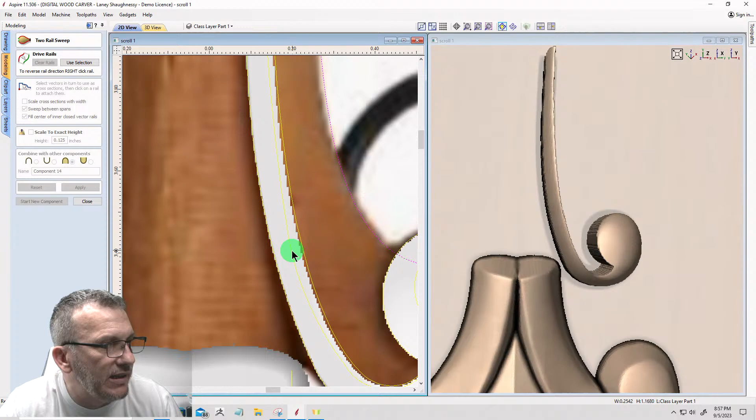Okay, wonderful. Now, create a new component. Come in, select this line, hold down the shift key and select this inside line right there. Oh, hold on, I gotta join these two lines, they aren't joined together. This has to be one continuous line from here to here.

Okay, one more time, select that. Perfect, shift key, select that. Next, great. This one is going to be my, what is this shape? It is concave to convex to concave. So here,

oh, let's first go back into the 2-rail sweep tool. Hold down the shift key, select that line, then that line, and that's our selection. It doesn't want me to, there you go. Alright, it took a minute to select that line. We're going concave.

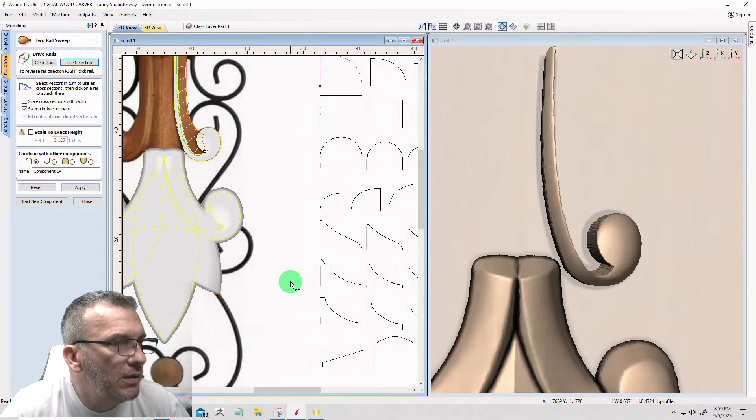That's where it's going to start, to convex. And I want it to get smaller as it gets closer, so we'll go here. And which ones you pick, you're going to get different results depending on which ones you pick. I'm going third one in, and that's going to end there. All right, merge, click apply.

Okay, once again my rails are backwards, I did that last time too. It's turned around like 180 degrees. So I need to just pick a rail and right-click and swap the rail order. Swap, you don't reverse the rails in this case, you want to swap the rail order. Reverse the rails would be if it was kind of a convex versus a concave kind of thing, if it was upside down or backwards. But this is just flipped around, so swap the rail order and then click apply again.

Okay, so it's concaving into that. Perfect. All right, so now we're going to close that tool. We're done.

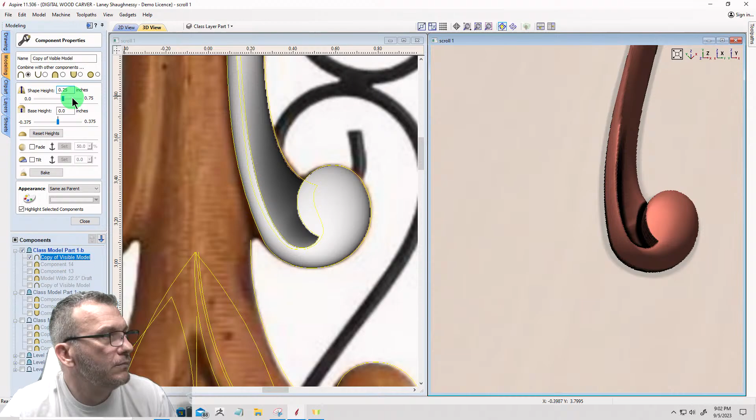Okay, before I go any further, I'm going to make sure it's the only thing visible. I'm going to go to sculpting and try to sculpt this again, smooth out the edges and everything. This is where I always kind of make it look funky. Let me see if I can get up close and up front there. Let's maximize this view.

So everybody can see, with the smooth tool, right on this ridge, I'm going to run over this ridge.

And I still have that, I always get that little ridge. I'm not sure why I get my little ridge there, but I'm going to take the smudge tool, get down in there, make it real small. And I'm going to see if I can pull some of that into that corner a little bit, and then go back to the smooth tool and smooth it down.

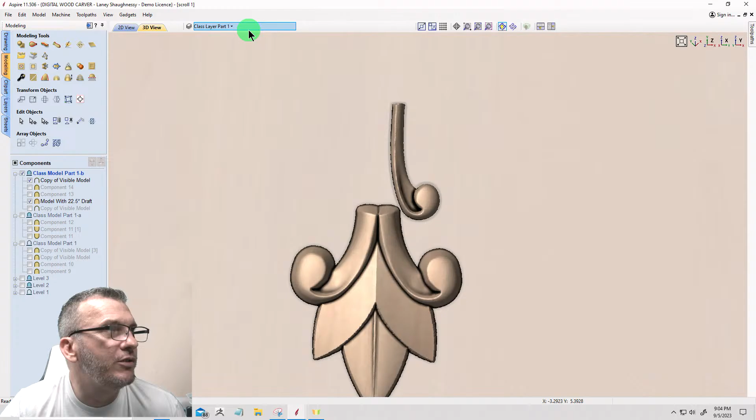Now let's go back to our 2D view. And that center line, I want to keep that center line that's here. I need to now move it up. I'm going to hold down the alternate key. Let me undo that, Control Z.

When I grab that, I want to hold that alternate key down so it stays in line where it was. I'm going to take this component, select that line, and flip about the line. I'm not concerned that it's the same on this side and everything, I am kind of in my center point there. So again, this wooden model behind this reference is just a reference, it's not going to be my exact - I've still got to build all my other parts. But I'm centered on my components here and stuff where I want to be.

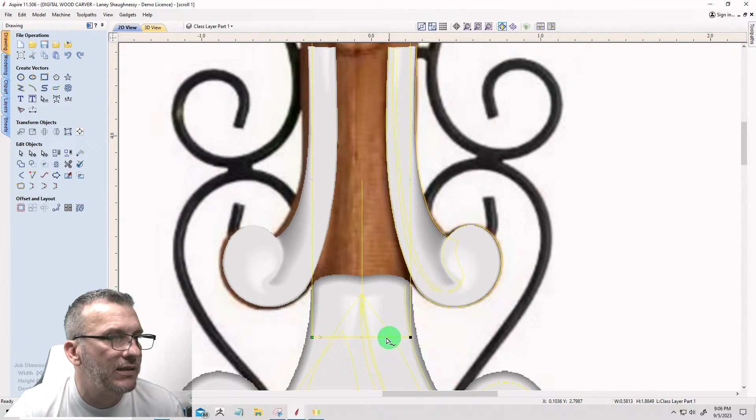Now the next part is going to be 2 lines. I'll use a rectangle to make it quick and easy. It's going to just kind of come down and overlap. Okay, and on this I'm going to go into node editing and I'm going to delete that bottom line and the top line, so it's 2 separate lines. It's called a span. So now I have 2 lines.

And I think I'm going to make this line a Bezier curve. I think I want to follow that curve ever so slightly - Bezier curve. So it flares out. All right.

Now, 2 rail sweep once again, ladies and gentlemen. So we're 2 rail sweeping it again. Cool, cool. Save, save, save.

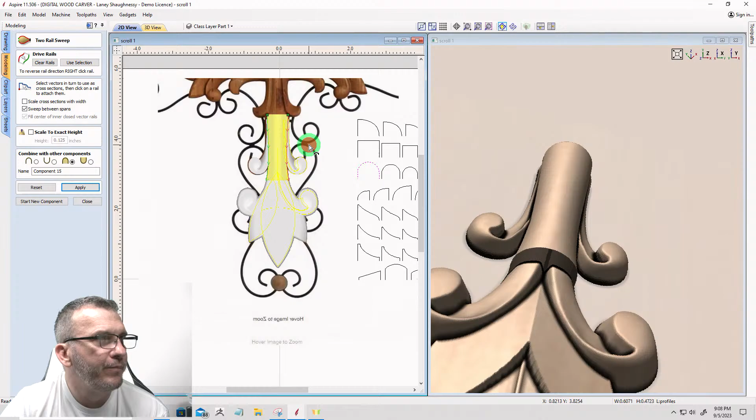Let's see, my lines are going, so let's do this. Let's reverse the rails so they're going the other way. We'll make this our first, and we'll make this one down here at the end. Click apply, so that way it'll taper down as it goes, and I can use the fade tool to help me as well.

That's good, let's see here. All right, so we're going to use the third one in. And then I'll just use the fade tool to help me just kind of blend right into that and everything. Still got to use the blend tool and all. All right, wonderful.

All right, now if I use the low tool, if I set that to low, it's not going to be right, it's going to be wrong. It's going to be kind of getting rid of things in here and stuff. So I'm going to use merge.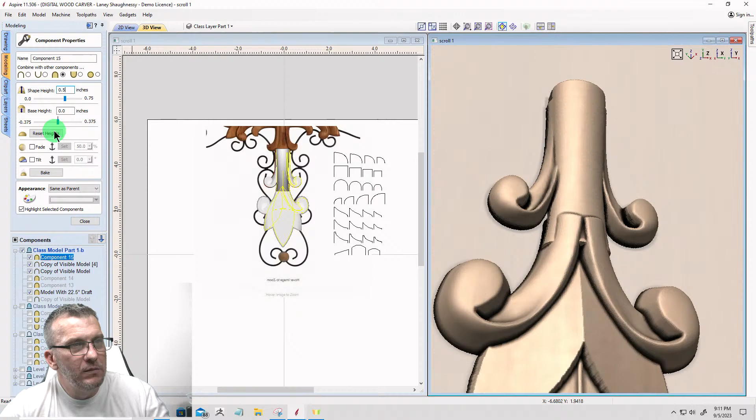Four, 3, 7, 5. I just want to get it somewhat close so I don't have to fade too much. All right, so that's almost got me there. I'll go a little bit more, let's go 0.44.

Okay. Now, coming out to this shape here, on that sweep, I should have really actually been in a little further. I shouldn't have come all the way out to the edge. I should have really been in a little bit further and everything. Bringing this in a little bit more on the sides so it's more of a flow.

I want to, after all that work, I know what size I need to be, 0.44, but what I want to do is change my rails. So I'm actually going to delete that component, and I'm going to change my rails. I don't want that coming out to the outside of these. I want to bring it in more so it's more inside, more in line here. So more of this outside shows.

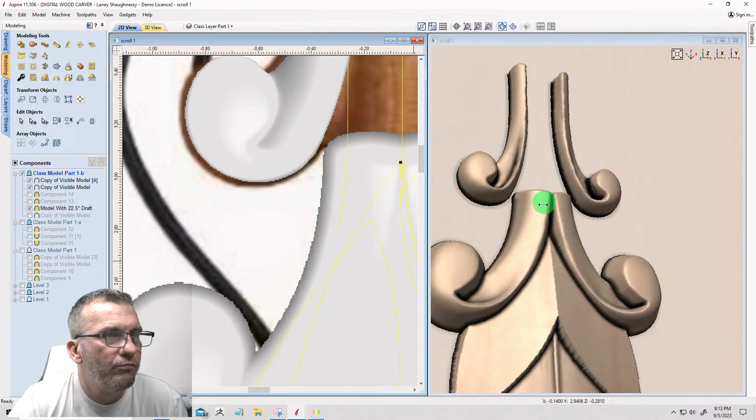Now, since I've been flipping about this line and everything, I'm going to get rid of this rail there, and I'm going to get out of node editing mode, and I'm going to select this rail, and I'm going to flip it about this line. Since I've been using that line to flip on, I'm going to flip on that line. And then I'm going to use a 2-rail sweep.

I'm actually going to use more of this profile where it's just straight up and then it's just kind of slightly rounded there. Use more of that profile. And click apply.

I want to scale the cross section with the width also, so as it gets wider, I want it to scale with it. Whoa. Merge. Merge, not add.

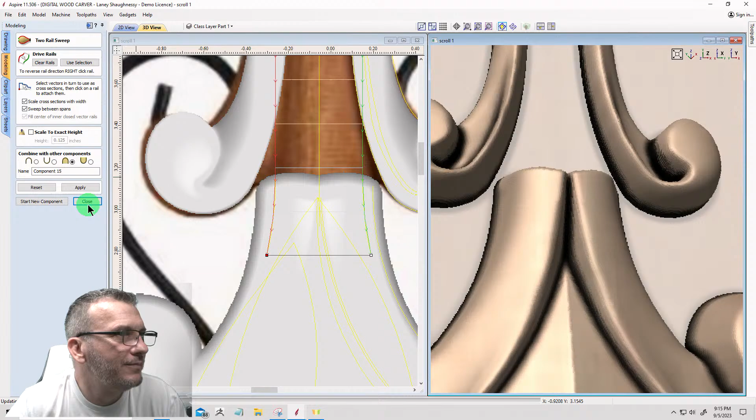All right, I'm going to delete this rail. Why copy what you can paste, or whatever? Why draw what you can copy? Let's draw this one.

I've got to, it's got to, you know, blend in.

I'm going to smooth that point out, make it a Bezier curve, so it's going to kind of bulge. Now I don't want to smooth that point out, because if I change that, it changes this. So let's turn the smoothing off on that.

All right, let's mirror that over. I don't know how that's going to come out, but we're going to find out. All right, 2-rail sweep. Merge. Apply.

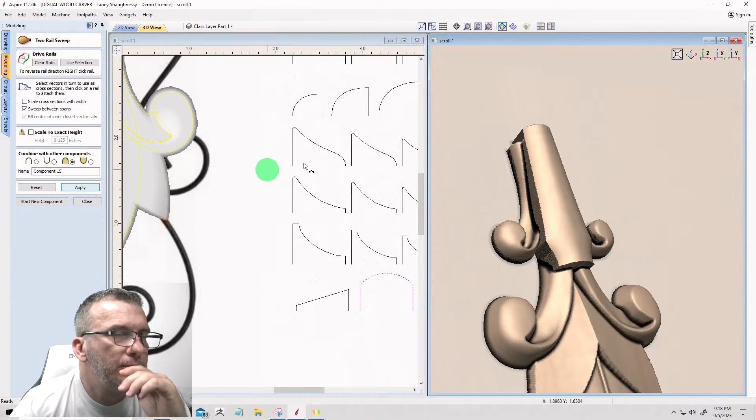Okay, let's try this smaller one.

Okay, starting to get the shape I want, and now it's starting to really define to me what I want. This needs to come in like it is, a little bit more here on the sides, flare out just like it is here. When I smooth that, that'll look good. I need to raise it up there. That'll be the wedge, that'll be the tilt.

Bring that up there. But I need this to kind of come out. I need it to flare out more a little bit there. So, just one more time. Last time. That's how we learn things.

I need to close this tool. Okay.

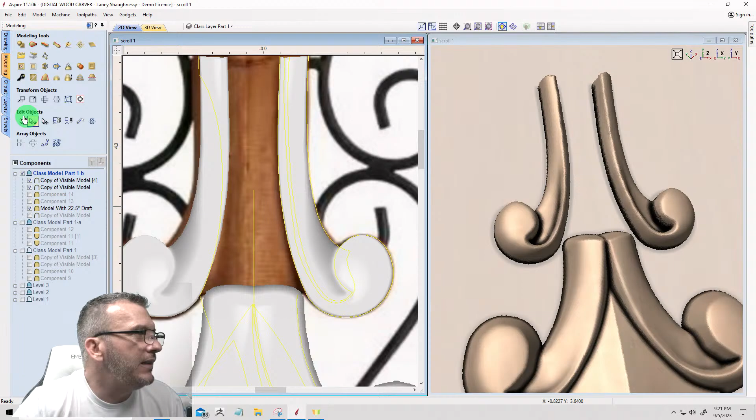Now let me mirror that over again. All right.

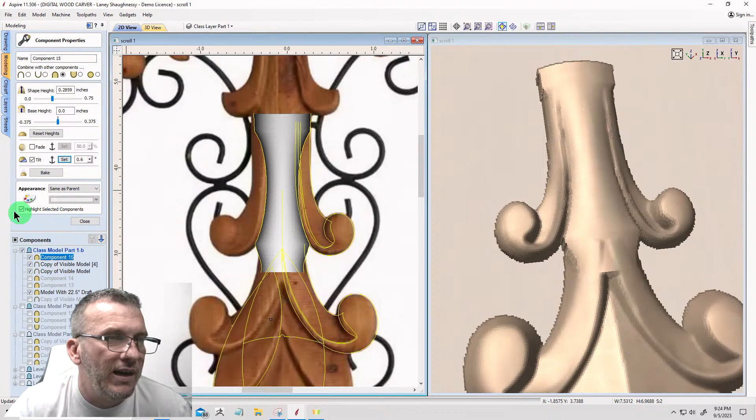So I want to just break the surface right there. Don't worry about that. There. Don't worry about that. You'll see why.

Okay, next component. We'll do that one next. Hold on, let's go up here, this component here. We're going to do a fade, and I'm going to go from the tip of the spear up to here.

Okay, and it's not going to be a 50% fade. Okay, so 3. Wait for it. 4. Okay, close that.

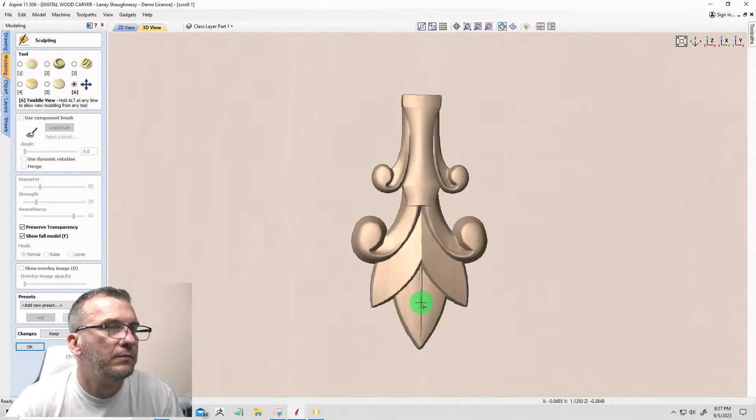We're going to go into sculpting. Let's twiddle the view. And I'm going to tilt it, instead of straight on, just a little bit so you can see what's happening here. All right, you should be able to see that. Kind of focusing my attention on this upper area. We're going to do a smoothing first.

Give it the same amount of love on the other side. All right, click OK.

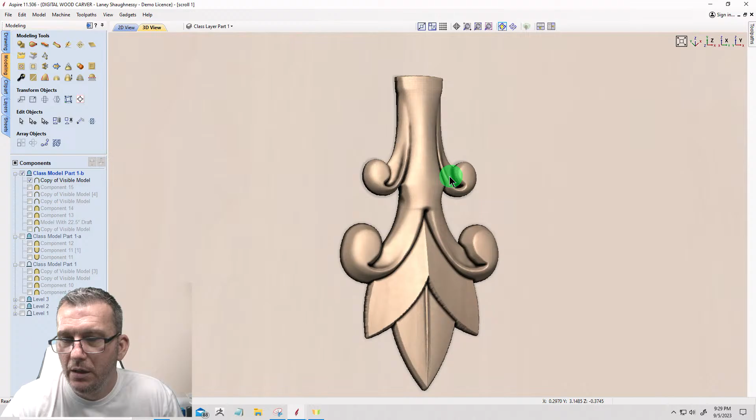Right now, I am modeling. Anytime I create a model, Harvey, so that's a good question - what model resolution are you at? I always create a model unless I'm selling it. If I'm selling it, I'm using the maximum resolution. If I'm doing something for myself, or something that can be shared and have great resolution and everything, I generally work in extremely high.

So you obtain those extra resolutions by holding your shift key when you go to the job setup and dimensions tool, and it shows you those additional options. But we're working at extremely high for the modeling. And if I wanted to switch over to the maximum, it would regenerate that model in that maximum view, but it's not really going to make too much of a difference.

All right, let me go back to the extremely high. That way it doesn't buffer or anything crazy like that, which it shouldn't now with this new setup of mine. But, okay.

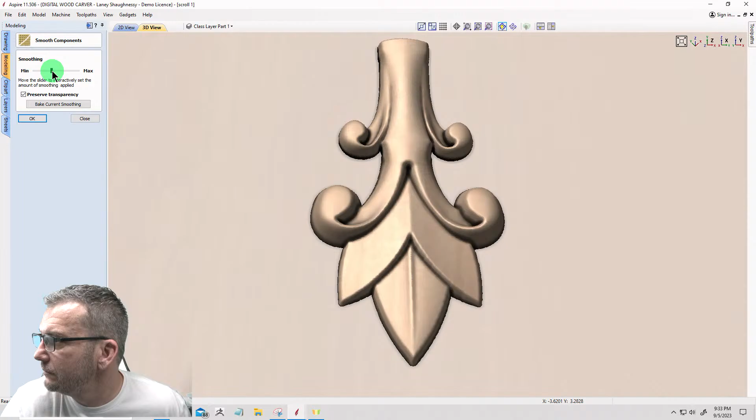I don't want to go too crazy just yet because there's still a lot more to build. But all right, we'll leave it at that. Okay, so this is our, as of right now, this is the lower half of our cross. The shorter part, which is this part right here, the leaves and this lower part, not this upper part, that will make up the four sides of the cross when we come back and revisit this. But we're going to leave it at this tonight, ladies and gentlemen.

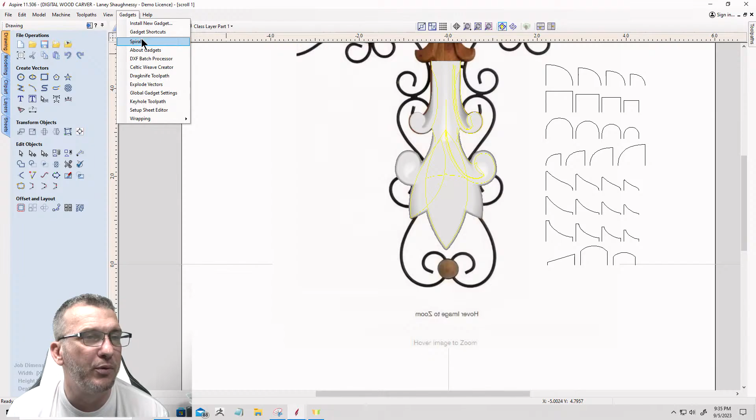But I do want to give you a little sneak peek of next week before we say goodbye. The spirals, when we do the spirals and stuff, we're going to be utilizing a gadget called the spiral gadget. If you don't have it, in your Vectric software, go to the gadget library and download it for VCarve Desktop Pro or Aspire. It's a pretty cool tool. Basically the spiral gadget creates perfect spirals, and there's different kinds. I'm not an expert on spirals, but there's the golden ratio spiral, the involute, Archimedes spiral, and logarithmic. Your width, how many times it spins around, and your arbitrary only affects logarithmic and involute. But depending on your settings, it's going to create these spirals.

So, for instance, this spiral here. Now imagine if I rotated this and kind of sized it down a little bit to be realistic. That's going to help us create this spiral. And then there's another spiral on the other side of it. We're going to basically end up mirroring it, flipping it, flipping it again. And it's going to end up connecting. I'm not saying how or where or whatever. It's going to be sized smaller.

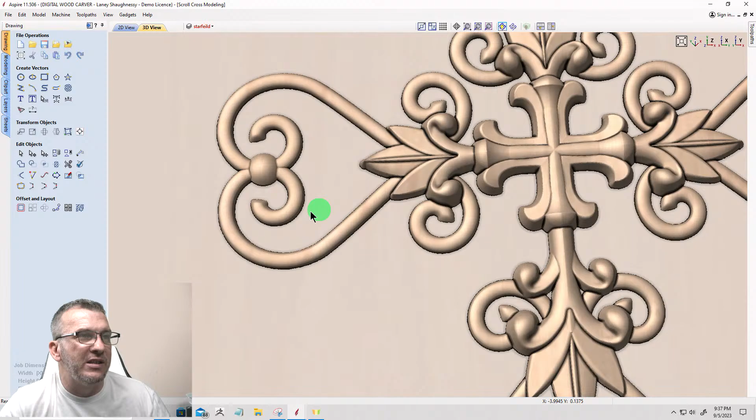And there's going to be a straight line. We got to straighten up some vectors. This is all next week. But that's how we're going to be creating these spirals, which you can't really see. But again, if we look at this from the class, you can see this spiral coming around and around, right? Around and around. And so we just create that one spiral and it gets mirrored around four times. That's how we're going to create those parts.

So we have the lower half here. We got the upper half, the whole shaft here. All we have to do next week is create this middle part, make some copies of this around here, and then create our spirals to finish the part. You're going to get to see all that next week, next Tuesday. We're going to be using the spiral gadget to help with these spirals underneath, along with the single rail extrude and weave tool in the drawing. All that next week. Be sure to come back and join me.